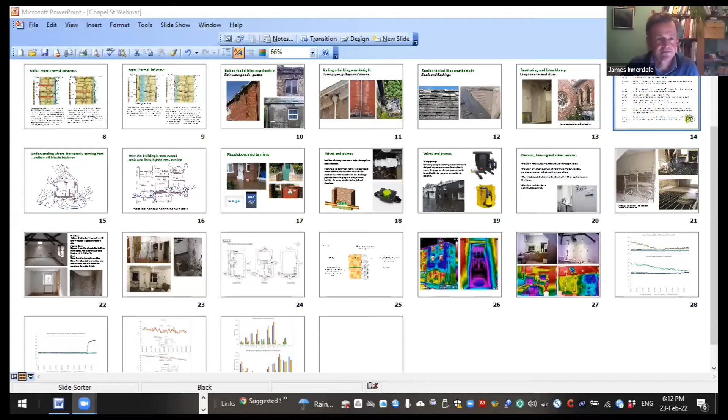A little bit of what I'm going to say is sort of repeat what Chris has already said, but with some pictures as well. I was asked to be involved as an architect. I'm a conservation architect, I work with historic buildings most of the time. And Chapel Street's a really interesting project in that it's a combination of looking to improve the energy efficiency of the building, but at the same time looking at the fact that it also needs to deal with issues of flood, so flood resilience, and frankly not just flooding, but as we've experienced this winter, just more extreme weather, more of the driving wind and the rain that the building has to cope with.

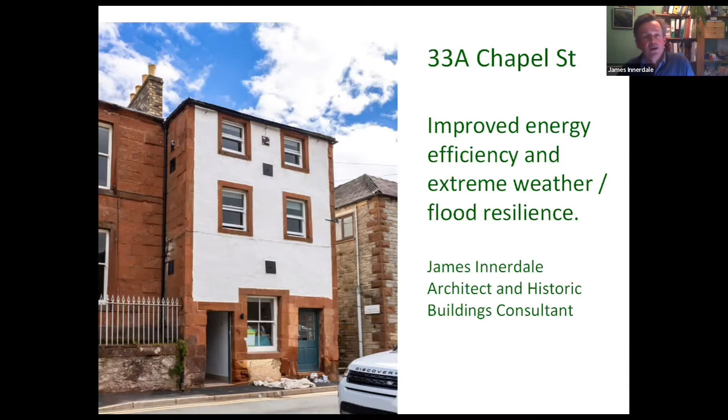So that image is thanks to Ilyas from their website, showing it in its very nearly completed guise with a new lime render on the outside. This is it in its early days, as Chris said. It's a red sandstone rubble building. You can see the building next door is a dressed red sandstone property, but this one is rubble stonework, so it's rough rubble, but it's rubble stonework with originally a lime harl or lime thrown render on the outside and dressed sandstone surrounds to the quoins in the corners and the windows and the doors.

But that has been variously repaired or repainted in impermeable, sort of non-breathable paints on the outside, and the back wall was also re-rendered, as you can see on the right-hand image there, in a hard cementitious render, and there are various cement repairs done to the render on the front as well. That's a shot around the side on the left-hand side. You can see, if you can see my mouse, this is actually the original lime render here, but then it's been variously patched and painted in various bits and pieces, and you can see the damage that the flooding has caused as a result of the fact that the water has been trapped within the wall and blown the render off and caused various bits and pieces.

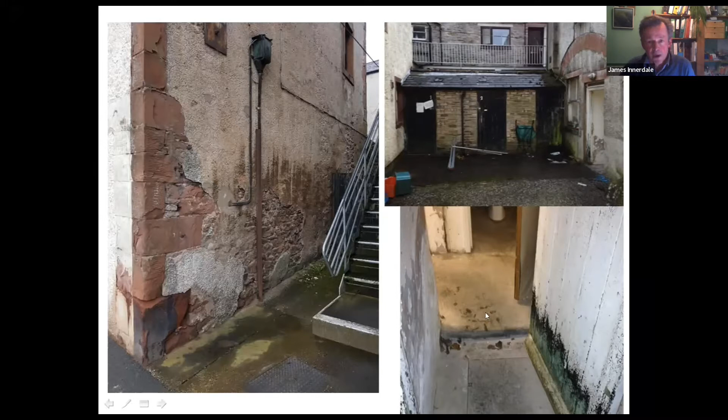And round the back, this is the back wall, and then there is a courtyard with a few outbuildings attached to it. We'll come back to this later, but when it did flood, water came in both from the front and also at the back into this courtyard as well. The bottom image is a view looking out towards the rear courtyard of the property. So here are not very clear images at all, but sections and plans through.

So it's on 3 floors: ground, first and second. Here's a cross section through it. Actually, this right hand image shows it better. You've got the street to the right hand side and the courtyard to the left hand side.

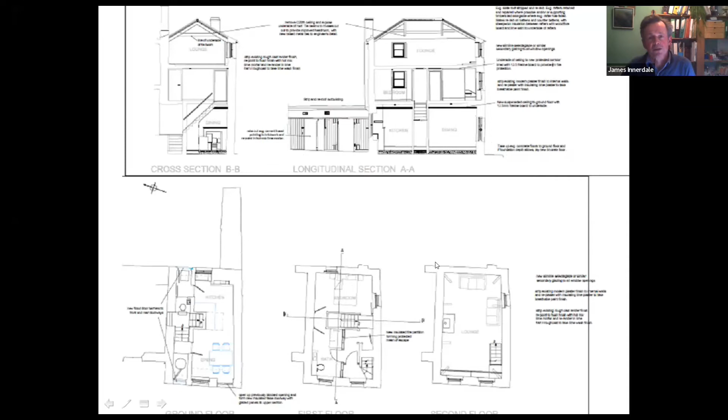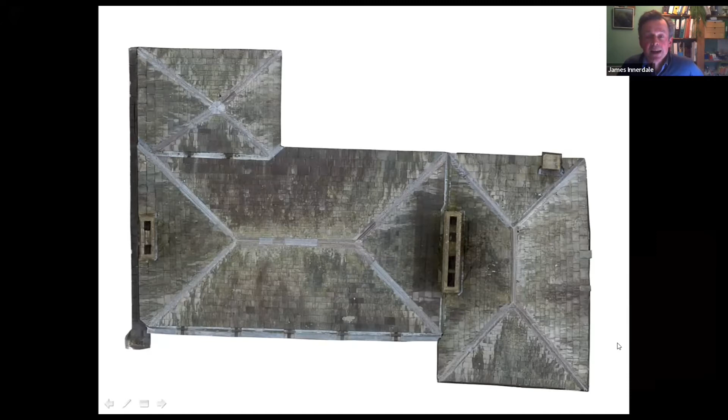When thinking about retrofitting a building, be it new or older - and we're talking about a traditional building here - you need to understand how the building is constructed, because you need to understand the implications of the retrofitting on the actual physical performance of the building fabric, how it deals with moisture.

As you saw from the pictures of the building before the work started, what had been done meant the building wasn't happy, it wasn't dealing with moisture as it should. A traditional solid wall building like Chapel Street has 2 skins of masonry rubble stonework with loose fill in the middle, built using lime mortar, and the stonework itself is also porous and permeable.

The principle is such that when it rains, the wall absorbs the moisture, and when it stops raining, that moisture is allowed to evaporate out again - the idea of breathing, which I'm sure you're all familiar with.

In the case of Chapel Street at Appleby, there was also a layer of lime render historically on the outside, which would have aided that drying process. And historically it would also have had a lime plaster on the inside that would have aided the drying process to a degree on the inside as well.

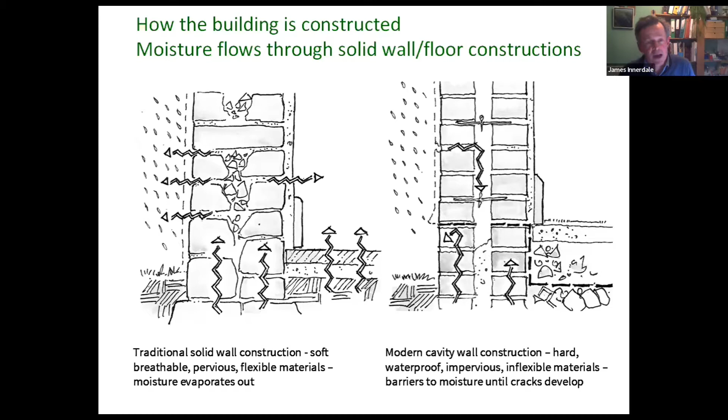...and water gets through those cracks and into the core of the wall, by putting that layer on the outside you stop the wall from being able to evaporate the moisture out, and the water gets trapped within the wall, causing problems with dampness inside. As at Chapel Street, you also get the start of problems with erosion of the stonework as well.

In a bit more detail: the lime mortar with which it's built is, or should be, of equal or greater porosity than the stonework itself, on the basis that most of the evaporation of moisture in the breathing process happens through the lime mortar joint.

So if you replace that with something less porous, less permeable than the stonework, the evaporation of the moisture then occurs through the most porous element of the building, which is now the stone or the brick. And when it does that, it brings with it salts, which then crystallize on the external surface of the stonework and cause erosion of the stonework.

On the right-hand side, two examples here. This is a very exaggerated version, but this is a red sandstone building which has been very heavily pointed in a cementitious mortar. That erosion you're looking at there is principally a result of the fact that they've used a cement-based mortar rather than a lime-based mortar.

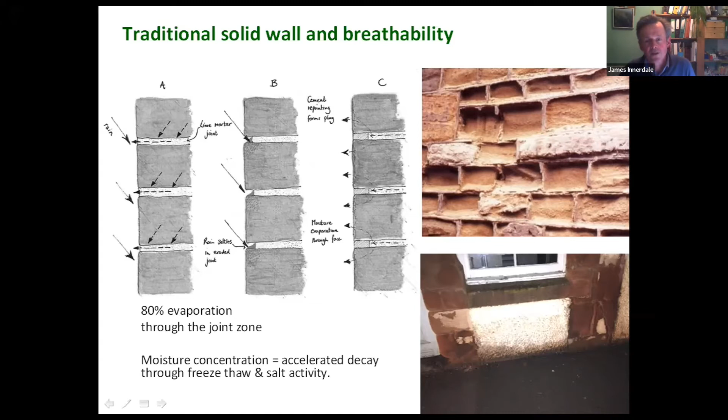But similar things were happening at Chapel Street as well. At the bottom, on the front, you can see there was increased erosion of the red sandstone dressings at the base of the door, and that was because the building was flooded, water is being absorbed by the wall, and the most porous element of the building now is the red sandstone surrounds of the doors and windows. So the water was coming out there and causing increased erosion to those sandstone elements of the building, and causing the building discomfort at the same time.

And from the context of retrofitting and adding insulation, you need to bear in mind that process of breathability, and bear in mind that that process also requires a degree of warmth in the wall to allow the evaporation process to occur. So you need to think about, if you're introducing insulation into your building, what impact is that going to have on the performance of the wall in terms of the evaporation of the moisture, allowing the moisture to dry out.

So your options are, if you insulate to the external face, which you can do - and I know Ilyas afterwards will talk about different types of insulation - you can insulate externally. If you do that, it has the advantage that you're using the mass of the wall to hold the heat from the house, so the wall acts as a heat store.

However, if that insulation you use on the outside is not breathable, you are in essence putting a cementitious type render on the outside and trapping any moisture that gets past it in the wall, which is a bad thing. There are breathable forms of external insulation, and certainly in the right situation they have their place, but external insulation also has the issue that it has a significant impact on the external appearance of the building around doors, windows and eaves.

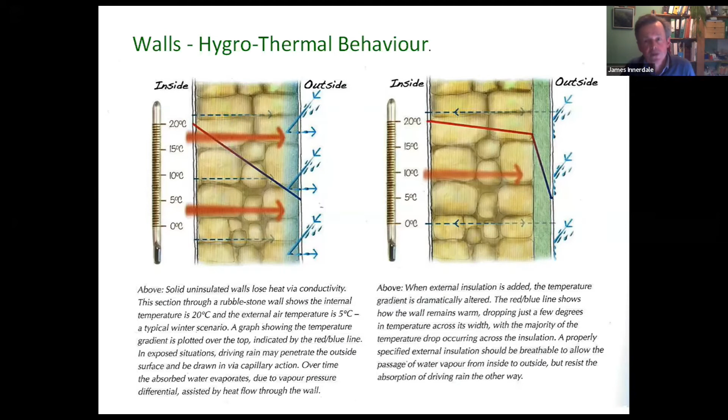So your other option, if you're not going to insulate on the outside, is to insulate on the inside. And if you do that, the implication is that less warmth from inside the building is getting into the wall. And you need to think about what the implication of that is on the drying process. And that's actually quite important.

Because in addition to the heat or warmth you're getting from inside the house, there is also moisture vapor from us generally living, our general living process, just being in the property - we're producing moisture vapor, and that also travels into the wall as well.

With your sort of impervious, impermeable insulations like foam boards - without naming any particular product, but the cheaper insulated foam boards - they're cheaper, but they're not breathable. In theory, they should come with a vapor control layer, which stops that vapor from traveling through the insulation into the wall. But more often than not, they're not very well fitted, and that doesn't actually happen.

And that's an issue, because if that vapor gets past the insulation and hits the wall, that wall is now colder than it was before, and there is potential for issues of condensation - actual physical moisture, rather than moisture in vapor form, becomes moisture in liquid form, so what we refer to as interstitial condensation.

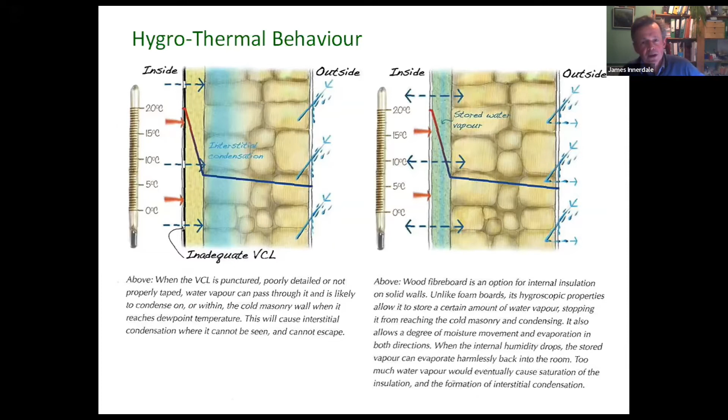However, if you use a form of insulation that is breathable, like we have at Chapel Street, it's significantly less of an issue, because the vapor that transfers through the insulation into the wall can equally be transferred back out again, and you have much less in the way of issues with condensation within the wall.

Another thought on Chapel Street: we're looking at issues related not just to retrofit, but also flood resilience. In both instances, before you start any of this, make sure your building is weather tight in the first place. Deal with problems you haven't dealt with for a while before going down the line of retrofitting. Make sure your gutters and downpipes are actually functioning properly.

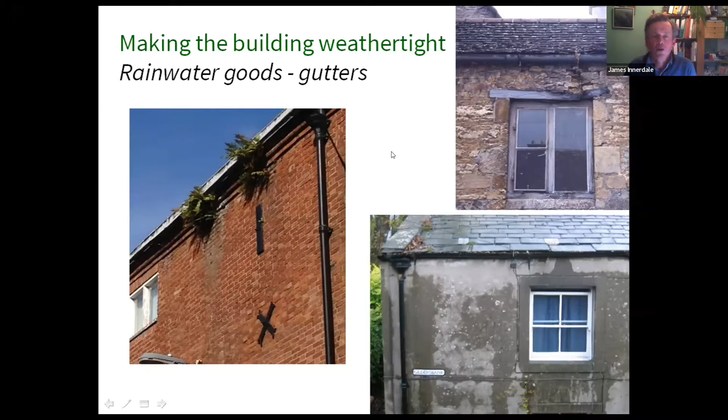If you're going to check your gutters and downpipes, go and do it on a rainy day like we've been having recently, because the building will show you where the problems are, where the water is spilling over the gutter. This image on the bottom right clearly shows a problem with the gutter - you might not have seen that on a dry day. So go out and have a look on a rainy day or immediately after one.

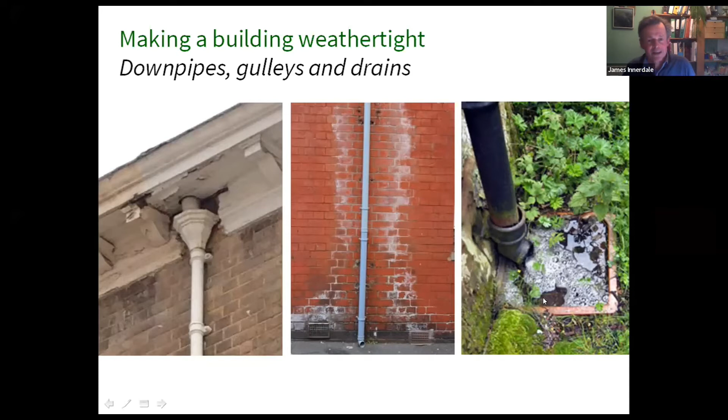And similarly, when you get to the bottom of your downpipes, make sure the gullies and drains and everything is working to actually take that water away from the building. Rainwater goods are key in that respect. And particularly also have a look at your roof as well - make sure it's working, particularly after the endless storms we're having this winter.

Check the condition of the roof, make sure the slates have not slipped, broken or gone missing, and also check the flashings where the roof abuts any wall or chimney, to make sure there are no cracks or failures. Usually that flashing is lead, but it might be, as in that image, a mortar-based flashing, which might be a hard mortar - they tend to crack over time, and water can drive in there and get into the body of the wall.

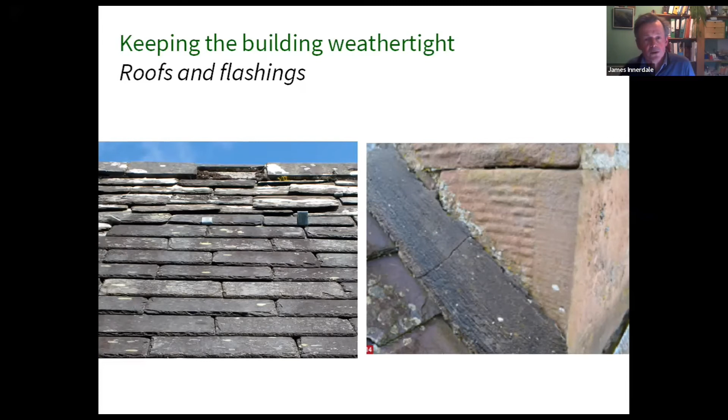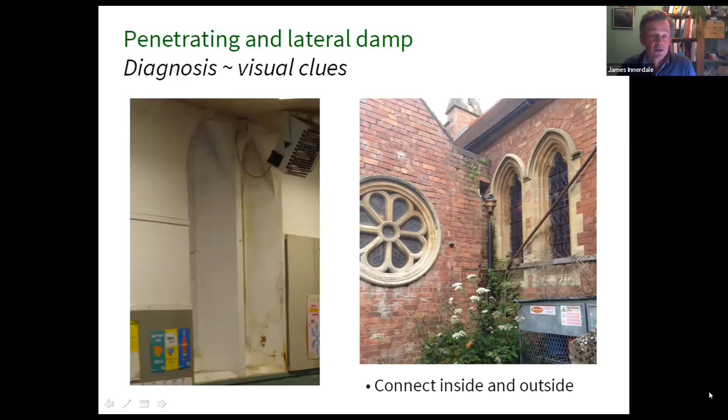If you went outside, the right-hand image is the outside view, and you can see we've got a blocked parapet gutter and a hopper which isn't connected to the downpipe. All of this problem inside is a result of the lack of maintenance outside. So that's important. And when thinking about flood resilience, we've also been talking about lime from the point of breathability - that's also important for flood resilience, because a lot of the materials used in traditionally constructed buildings are porous and breathable, and many can stay in situ because they absorb moisture but equally allow it to evaporate out again.

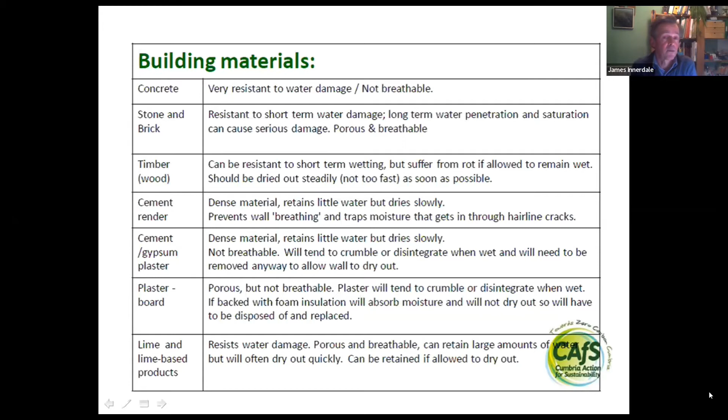So there isn't necessarily, after a flood, a need to strip out and replaster and lose all of those materials as part and parcel of that process.

And in terms of flood resilience, the other key element to think about if you're in an area with potential for flooding is, where is the water actually coming from? That is key. For instance, there is no point in putting a floodgate on the outside of your building if your building is going to be flooded as a result of groundwater coming up through the floor.

So it's important to ask: at Chapel Street, most of the water was coming down the street and coming in the back door and the front door. It had a concrete floor, so in addition to that, there was probably likely to be water when it flooded coming up from the ground below as well.

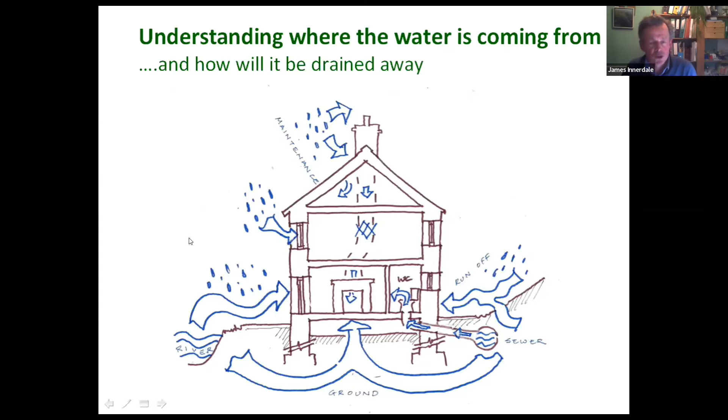But it's important to bear in mind, think about where the water is coming from, and that will perhaps help you make a decision in terms of what measures you should be undertaking from the point of view of flood resilience and flood resistance measures.

Also important to bear in mind, if you're in a terrace or a semi-detached property, what are the implications going to be of the work that you're actually carrying out?

For instance, if the water is coming down off the fell, and you put in a concrete floor in your building as part of your retrofit measures, that's going to stop any water rising up through the floor. But it's going to push, as Chris talked about before, the water to the base of the outside walls, and it may show itself as rising damp there, but also it might transfer that water across into the next door property and increase their issues.

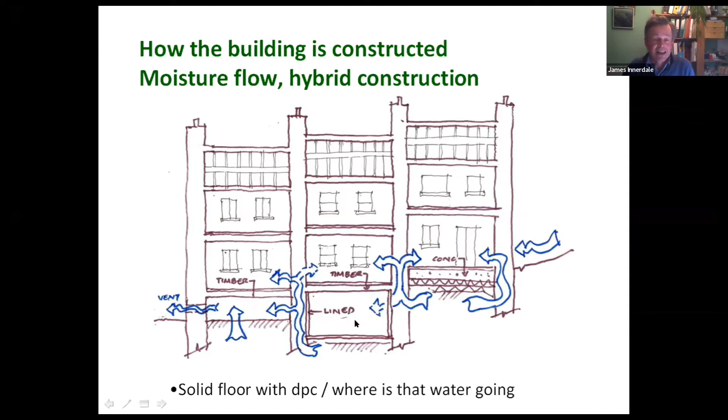So you need to think about what's happening with your next door neighbours. In terms of flood resilience and flood resistance measures, at Chapel Street it was a combination of the two, and with a lot of traditionally constructed buildings, that's what it's going to be.

It's using breathable, permeable materials that, whilst they might get wet, can dry out again and be left in situ without necessarily having to be stripped out.

That in combination with flood resistance measures, which basically means measures that stop water getting into your building in the first place. Whilst at Chapel Street these have not completely been carried out for various reasons, the idea was to introduce floodgates on the front and the back to stop the water coming in the front and the back in the first place. Also, there is a manhole immediately inside the front door of Chapel Street.

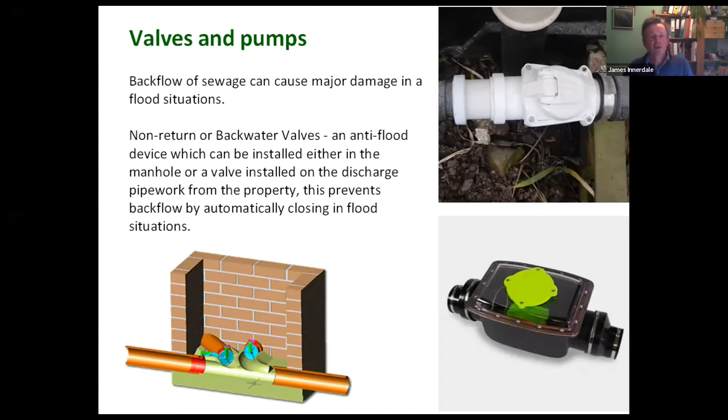The idea was to put in a non-return valve in that manhole to stop any contaminated backflow water coming from the sewers, backflowing into the house. So putting non-return valves in the manhole there.

And also we discussed the idea of putting in a sump pump in that front entrance area as well. A sump pump is set into the floor, and basically, as soon as the water gets to a certain level, it starts pumping the water out of the property.

That's very useful to keep your building dry for a period of time, to enable you to move things. If you've got precious objects and bits of furniture at lower level, it gives you time to move them away to upper levels before the water continues to rise outside.

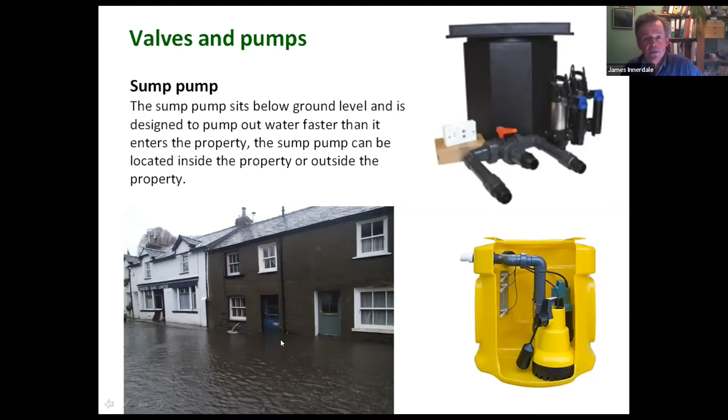And Chris has already mentioned the services, making sure services are in the right location, not within the flood zone, having your boiler at first floor, making sure all the services are coming down from above rather than up from below as well.

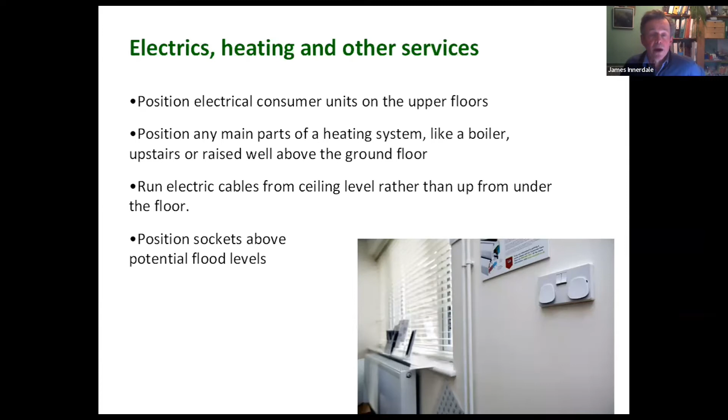So moving on to what was actually done at Chapel Street, I mentioned the flood resilience measures.

In terms of the retrofit, at ground floor, the existing concrete floor was broken up and replaced by another solid floor, but a breathable one - a limecrete floor. That's what you can see going in on the right hand side. It's recycled foam glass being laid as a base layer, then a lime screed laid on top.

There's underfloor heating within that. The idea is that if the building floods, that doesn't have to be stripped out. It can dry out over time, enabling you to continue - you may have to leave the building for a short while, but at least get back in fairly promptly afterwards.

At ground floor, there was the issue - and this is maybe something we can discuss later - that regrettably a lot of the insulation products appropriate for traditionally constructed buildings, breathable forms of insulation, don't cope very well with standing in water for a long period. So at ground floor at Chapel Street, we took the decision not to insulate the walls at ground level below the anticipated flood line, about 1.5 meters.

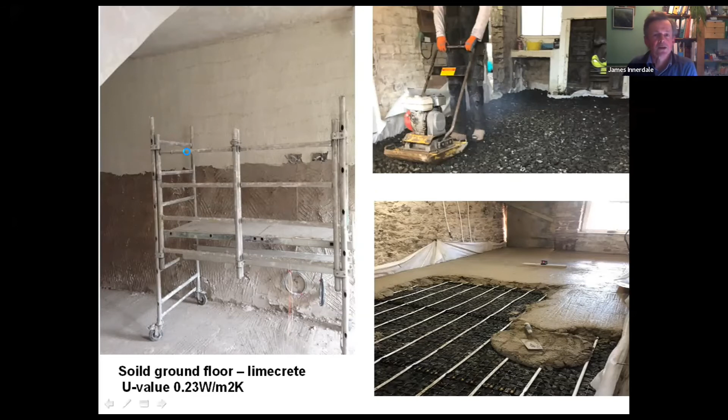On the upper floors, at first floor, which is this image here, it's the cork-based Diathonite insulating plaster that Ilias will talk about in due course. And at second floor it's Eden's hemp lime insulating plaster.

Interestingly, you'll see a difference in thickness there. At first floor it's only about 20 mils worth of plaster, as opposed to second floor where you're actually looking at just over 50 mils worth of plaster. That's because of the difference in thermal conductivity of the two materials.

What we looked for here was for them both to achieve the same U value, the same thermal performance in terms of the wall. So when we were monitoring it, we'd get a level playing field for both floors.

That meant there was a much thicker amount of insulation at second floor than at first floor, because the hemp lime plaster is less good as an insulant than the Diathonite.

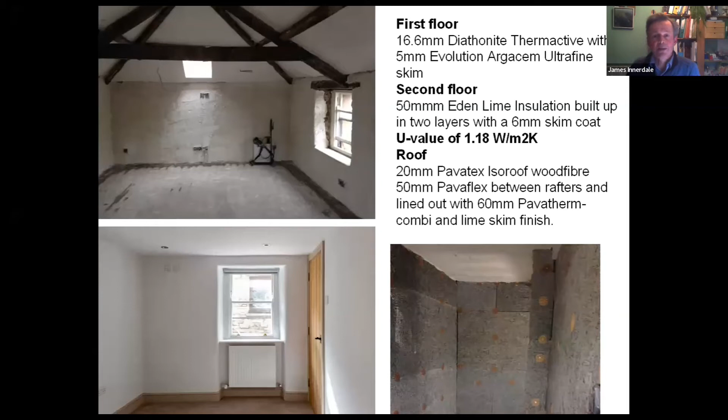On the roof, before it was reslated, the build-up was: slate, then battens and counter battens, then a breathable roofing membrane, then 20 mil of wood fibre board as a sarking board. Then flexible wood fibre batts between the rafters, and then a further 60 mils worth of wood fibre board to the underside of the rafter, which was then skimmed with a lime skim. That was the build up.

As part of this whole process, Historic England introduced monitors into the building, so we could actually see how these improvements performed in reality, rather than as a desk-based exercise.

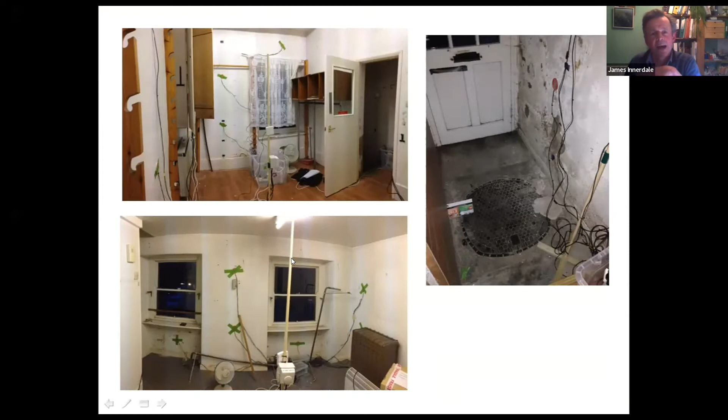These images are prior to the works being done. They did some monitoring to see how the existing walls and floors performed in terms of moisture content, relative humidity, and U value. Various monitors were put in various locations - this one shows dowels, a wooden dowel and some porcelain dowels, put in to measure moisture content.

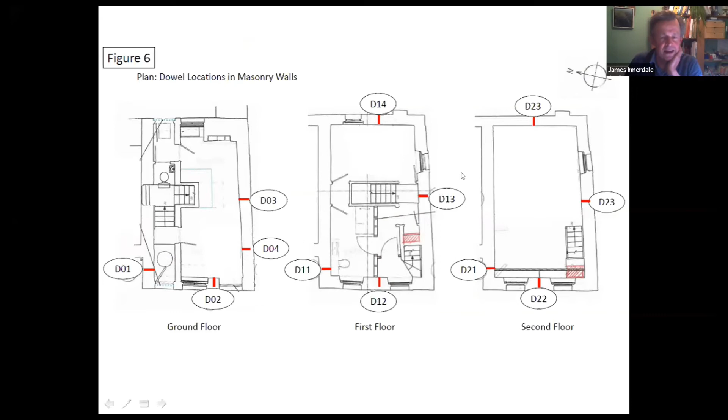There were also measurements for relative humidity and temperature, generally in the same sort of locations around the building on ground floor, first floor and second floor. Whilst all this data is not fully collected and put together, it has come up with some quite interesting bits of information.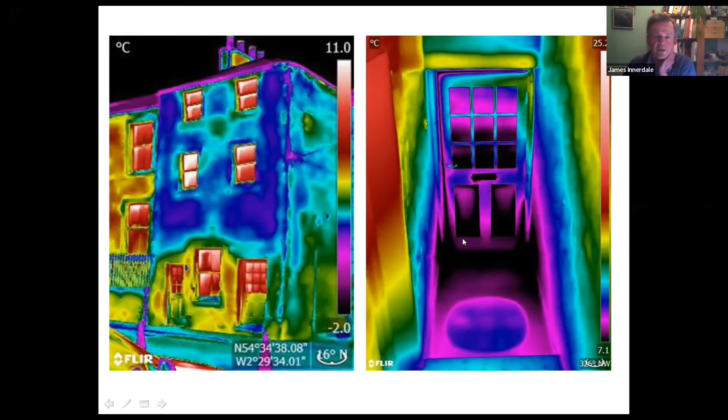Some other similar shots, ground floor, looking towards the street with the gable end to the left-hand side as you're looking at it. You can see the jade blue of the zone where it wasn't insulated, and then you get into the zone where you're starting getting insulation similarly there.

On the right-hand side, we have an image at second floor, looking towards the back wall, and you can see how well it's performing from the point of view of retaining the heat, other than this area in the corner here, which is still quite blue.

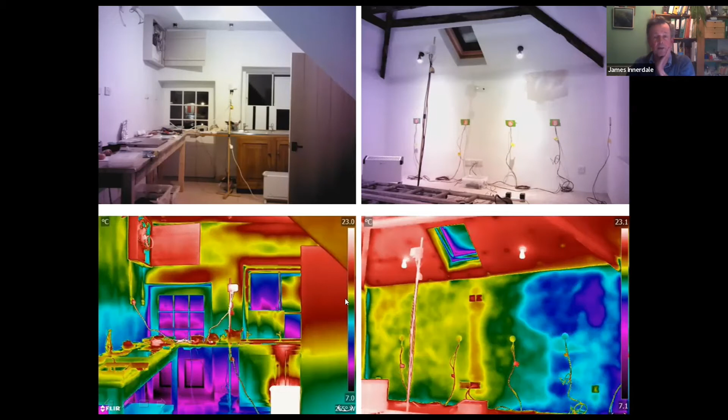I mentioned earlier that chimney at the back of the building, which was very damp, and obviously that is continuing to present a problem, but that area is still particularly damp, and it's going to take a little bit longer to settle down in that particular area. Thermal imaging cameras are really useful in this respect, in that they can show you where there are potentially ongoing issues.

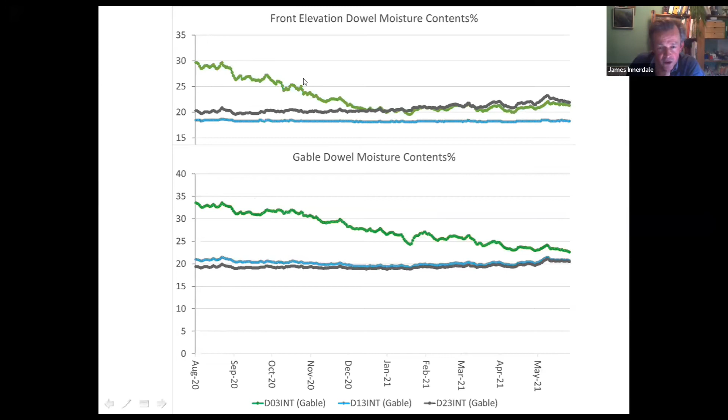Just reminding myself - so yeah, on the gable, it's dropped, that's the one that's noticeably dropping at ground floor. I put this one in as a little quirk.

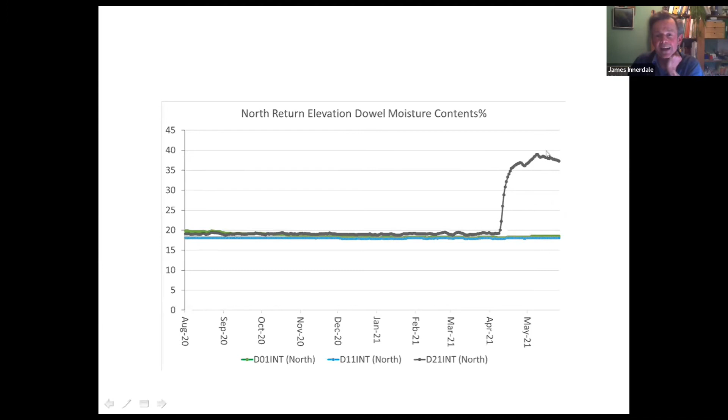So as an exercise, it's very useful - it shows you it's got wet, but then it's settling down and beginning to dry out again. There are also relative humidity sensors as well.

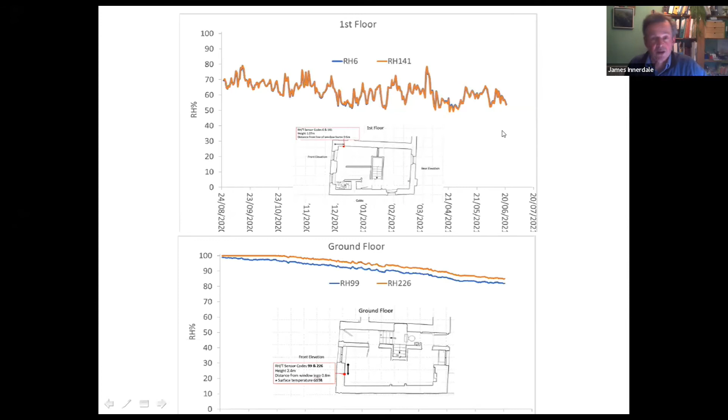So those spikes relate to the fact that the room is being used as a bathroom, and it actually shows, to a point, that the lime plaster is doing what it should be doing.

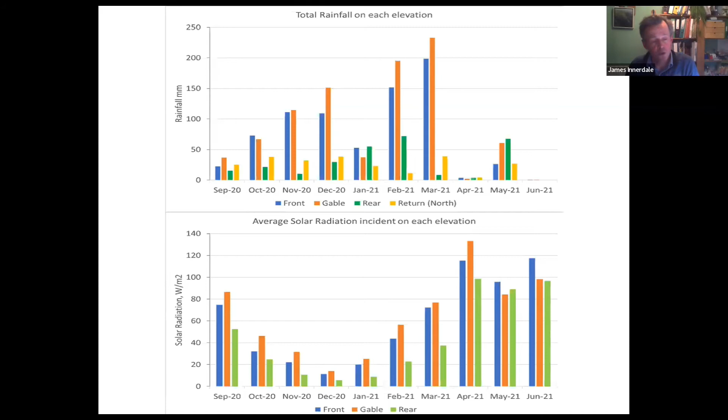And similarly, I don't know whether you can see them clearly at the bottom, but you've also got different ones to do with the sun and solar, and obviously the front and the side get more sun than the rear. That's potentially important from the point of view that sun and heat do have an impact on the ability of traditional walls to evaporate moisture out, and it's something you need to bear in mind as well.

I have overrun a wee bit there, but I hope it was useful.

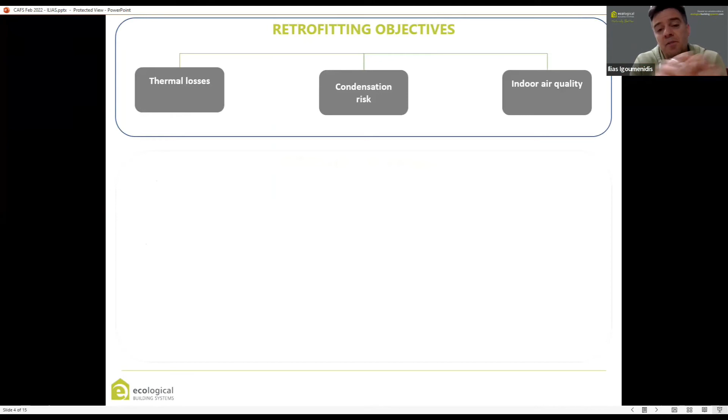To achieve that, we try to implement some strategies and take some measures. Passive House Institute talks about 5 main principles used for new builds and retrofits, and that applies across the board, whether it's passive house or not - these measures should be followed. Again, these are interconnected, and I'll go through them one by one.

So first of all, of course, is insulation. We insulate the house and try to minimize the thermal losses through the improvement of the fabric. We do that by trying to improve, or at least not make the thermal bridges worse.

Thermal bridges are all the cold spots, and the thermal imaging pictures James showed earlier brilliantly show all the imbalances in the fabric when you insulate some parts of it and some parts are not insulated. That's the challenge, especially in retrofits - you cannot do the best every time.

The third principle is replacing the windows if possible. Again, in traditional buildings or listed buildings, that may be a challenge - you may not be allowed to do that. But again, that's one of the challenges.

The fourth is airtightness. We try to improve the tightness of the buildings to eliminate uncontrolled air leakage through gaps and cracks and along the window reveals, for example. Lastly, when we do all that, we should incorporate a ventilating strategy in our design, because that's going to tie up the whole thing.

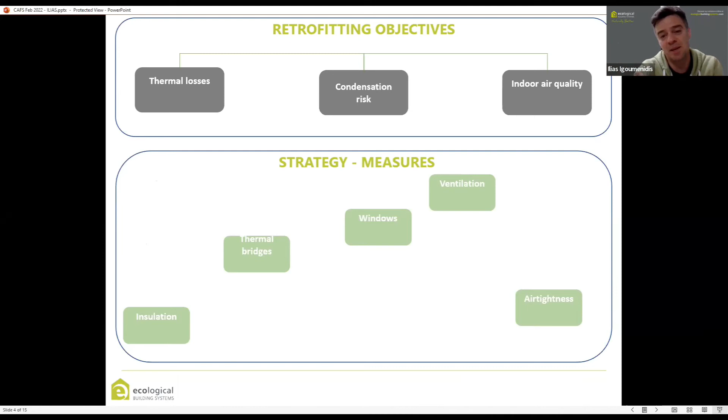Now, the placement of the green boxes is not random because I'm sloppy - it's for a reason. I'm going to start interconnecting all these boxes, and you'll see why. There are some benefits from each green box and some side effects, some risks that may be incorporated in implementing each of these strategies.

So by insulating the building, we improve the fabric, we reduce the thermal losses, right? But at the same time, depending on how much insulation we add and where exactly it's placed - James said before, it's different if you put the insulation on the outside compared to the inside. If you put it on the outside, you create a warm jacket, a warm building, so everything is included and condensation risk is minimized because you have a warm skin of the building.

However, if you don't do that - which is in most cases what's happening in solid wall traditional or listed buildings - if you put the insulation on the inside, then the actual skin of the building becomes colder, and that's where interstitial condensation may occur. So that's a side effect of the insulation.

And also, if you don't insulate everything smoothly and continuously - if you leave the window reveals uninsulated, or the intermediate floor junctions, or the shutter boxes, or any places where you cannot add insulation - these could be side effects, creating thermal bridges and potentially moisture risk.

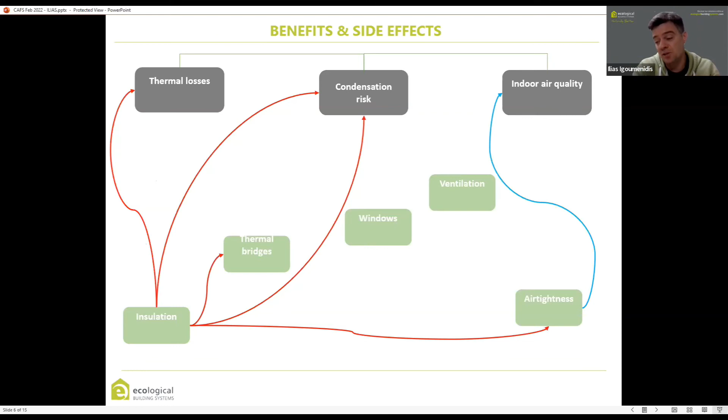And whenever you insulate your building, whether you design it or not, you are going to improve the airtightness of the building, and that may be a good or bad thing. It may be a bad thing, because when you improve the airtightness of the building, then you have everything enclosed and you may suffocate in there.

There's no fresh air coming in, or moisture like humidity getting out, so there's no refreshment, and that may be a problem. But on the other hand, by improving the airtightness, you reduce the thermal losses because you control the volume of air, and there's no uncontrolled escape of energy through the leakages.

But for the airtightness to be a success, this needs to be incorporated with ventilation, either natural or even better mechanical ventilation, a more controlled and well-designed form of ventilation, because that's going to improve indoor air quality by introducing new, fresh, filtered air into the building and minimizing the condensation risk, since it reduces and regulates the relative humidity and the vapor produced by our activities in the house. And if you use mechanical ventilation with heat recovery, this could also be beneficial from the thermal loss point of view, because the controlled air getting out and in the house is preheated, so you have a benefit by recovering some energy through that process.

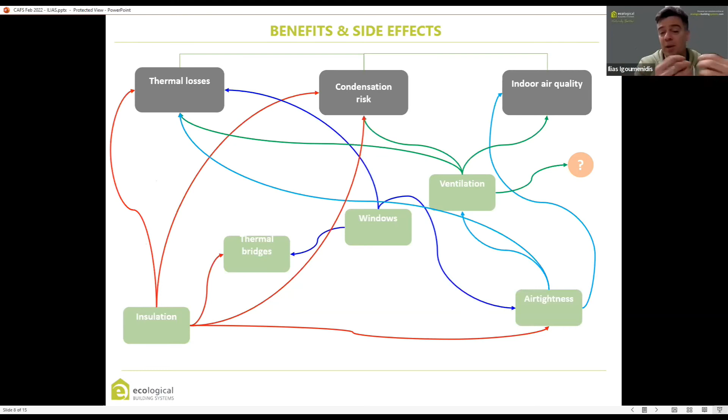So placing the windows on the inner side or the outer side of the wall may play a huge role in the thermal bridging effect. And of course, thermal bridges themselves are a side effect, so they create thermal loss, increase the thermal losses, and create condensation risk.

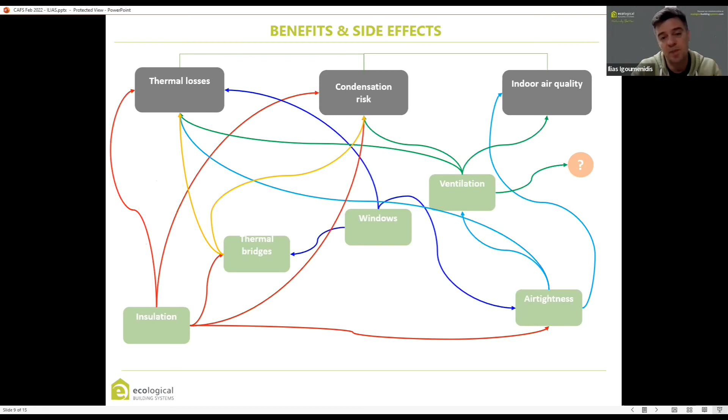So that's a spaghetti thing, and actually that's how we should think when we go and retrofit. Instead of taking one of the boxes, we should think in combination, consider all the side effects, and eliminate the side effects if possible. So the only way to do that is to have a whole house strategy, because otherwise we may create more problems than we solve.

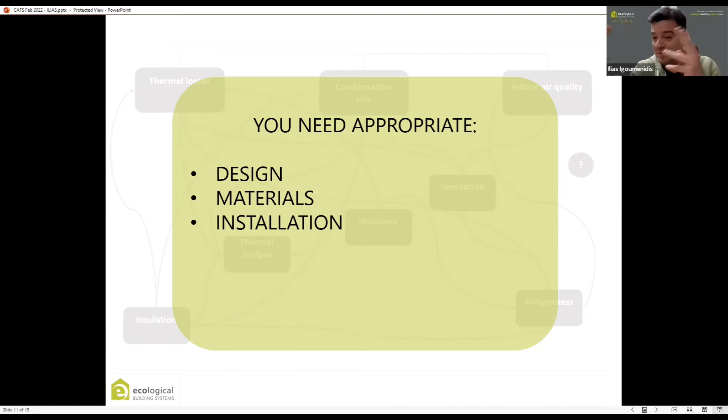And to do that, we need three things: we need a good designer, we need appropriate materials, and we need proper installation. So we have James here, we have Chris here, and guess what? We are here to go through some materials.

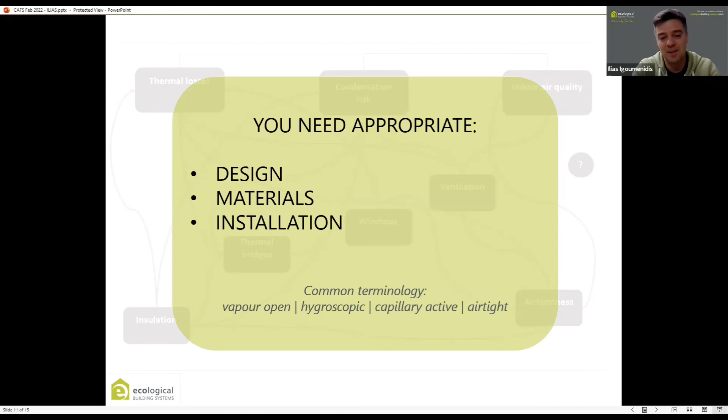You might have heard James talking about vapor open or breathable construction, hygroscopic. Another term that's usually used is capillary active, and of course airtight. It's too tight on time today to go through all that, but just as terminology, you'll come across all these words.

Now I'll go through some systems for the walls, roofs, and floors. So first of all, for the walls, there are lots of systems out in the market advertised for use as internal wall insulation. But as James said, we should be very cautious. We should be using vapor open materials.

We shouldn't be leaving any gaps between the actual skin of the building and the insulation, because this gap is going to create a huge risk, as there's high humidity on a cold surface behind the insulation, and this humidity should be somehow regulated. If it's not fully bonded to the insulation, then it's difficult to evaporate. So all these systems I'm going to introduce to you today are fully bonded to the stone or the brick.

So first of all, Diathonite, which has also been used in Appleby, in Chapel Street. Diathonite is a range of plasters and screeds, lime-based products, vapor open, and very capillary active. By saying capillary active, we mean they can actually actively pull the moisture off the wall and evaporate it to the inside. So they're not only breathable in the sense that they allow moisture to pass through, but they also assist the moisture actively to be transferred to the inside.

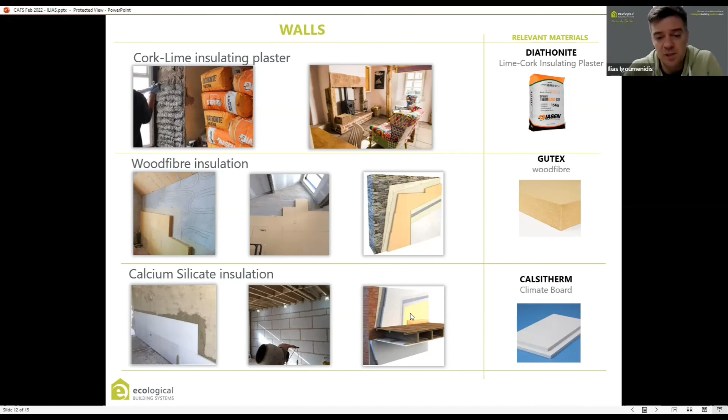What's important, though, is that you should, if possible, include all the detailing in your insulation and make sure the insulation is as continuous as possible, including intermediate floor junctions, window reveals, shutter boxes, and so on. So that was for the walls.

Now for the floors, again, James talked about the glass foam and that sort of floor solutions.

Now, if you have a solid wall or a solid floor like a slab, you can add some Diasen Diathonite screed insulation on top. Diathonite also comes in the form of a screed, so you can pour the Diathonite lime cork screed on top of a solid slab, or even on top of glass foam aggregates.

So again, dual use for Diathonite, and that's for solid floors. Now if you have a timber floor, that's a little trickier, because you have to take care of the airtightness. Air leakage from floors of that type is a huge pain, and owners always complain about cold feet and air leakage.

So we've developed a system using two sorts of membranes: a breather membrane, the Solitex Plus, one of the Proclima range. This membrane can be draped in between the joists if you're working from above, since usually the crawl space is inaccessible. That's the most common application.

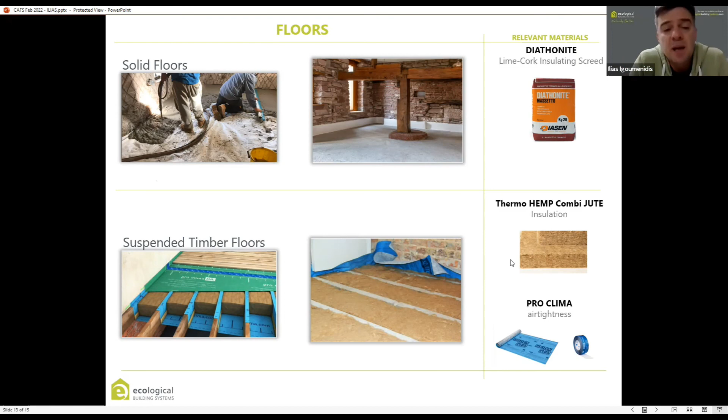And also for ceilings, when you have ceiling insulation at the ceiling level, you can use both these types of insulation, either in between the joists or above. What's also important at the ceiling level is airtightness.

You should take care of the airtightness 100%, because especially when you have a cold attic, vapor from the rooms below can pass through the insulation and through gaps and cracks, and you may get a huge amount of condensation on the cold timber in the cold attic, which eventually becomes mold and degrades the timber. So airtightness is important in this case too.

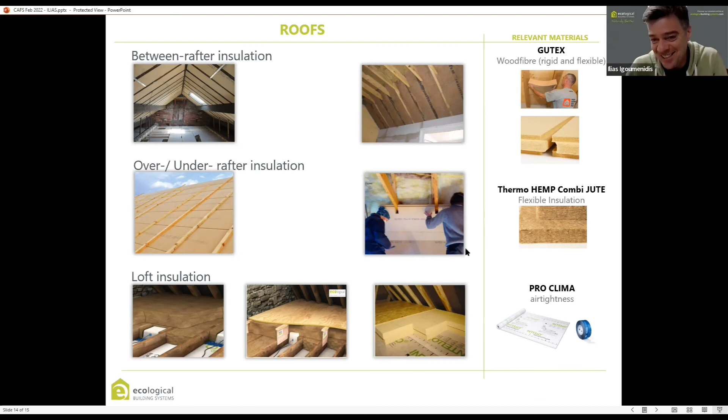I think that's all, very quickly. Sorry, I was a little bit nervous because we're running a little late, but hopefully I've covered some of it.

Don't worry, Ilias, that's been wonderful. Thank you very much, that was a brilliant whistle-through and tied in very nicely with the things that James talked about as well. So thank you for that.